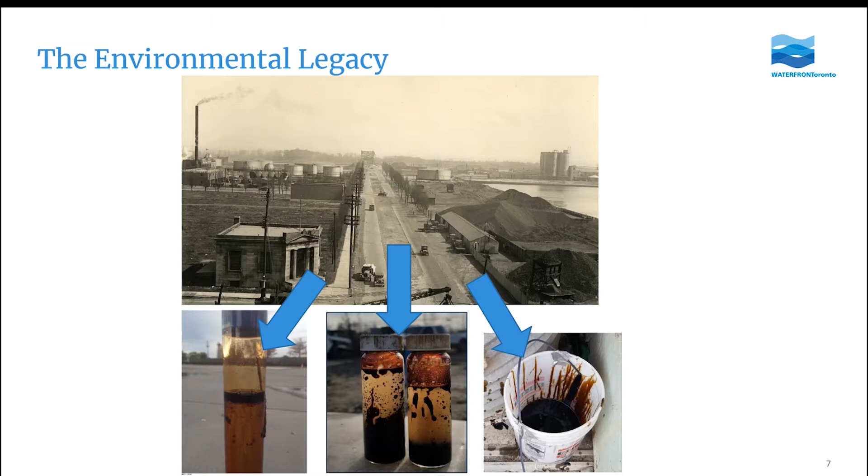I have some fun pictures here during some of the pilot test stages when we were able to recover some of the oil from the ground and look at ways to treat it. So this is some of the example of the oil that's in the ground that is present because of that former industrial practices. That's the significant environmental challenge of constructing a river through these lands that are heavily contaminated with this material. Next slide.

So these are the things that we work so hard through, over 6 years of looking at environmental strategy, doing over 300 different boreholes, another 300 monitoring wells to investigate and understand the soil and groundwater conditions through the Portlands area and come up with our really unique and very strategic environmental management system for building a new river. Next slide.

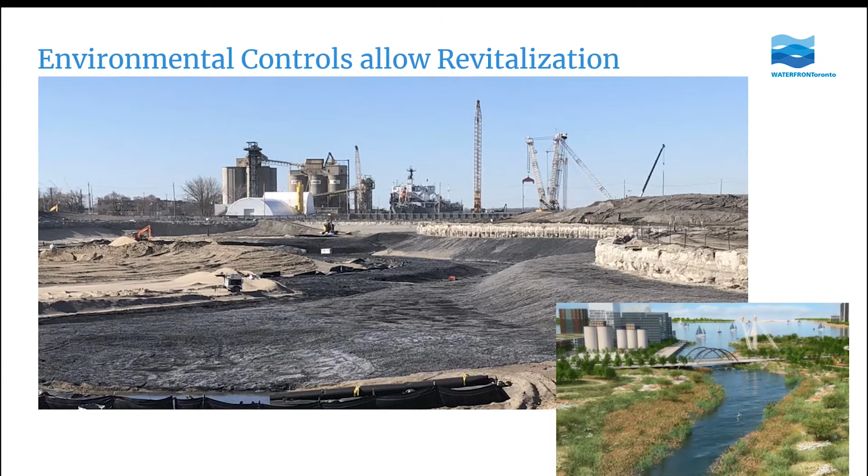Within the river valley itself, we have a system of features for environmental controls. You can see on the right side and the left side of the drawing, essentially a concrete wall that is the north and south walls of the river. And that concrete wall goes down 20 to 40 meters into the ground to make sure that the river inside is protected from anything that may be outside of the river. We also have a system within the river to protect from anything that might be coming from underneath the river. So what you're seeing is that black layer is actually part of the barrier system within the river that's comprised of a geosynthetic clay liner, a geomembrane, and then a reactive treatment layer, as a whole multiple layers of contingency to make sure that this river valley is protected. Next slide.

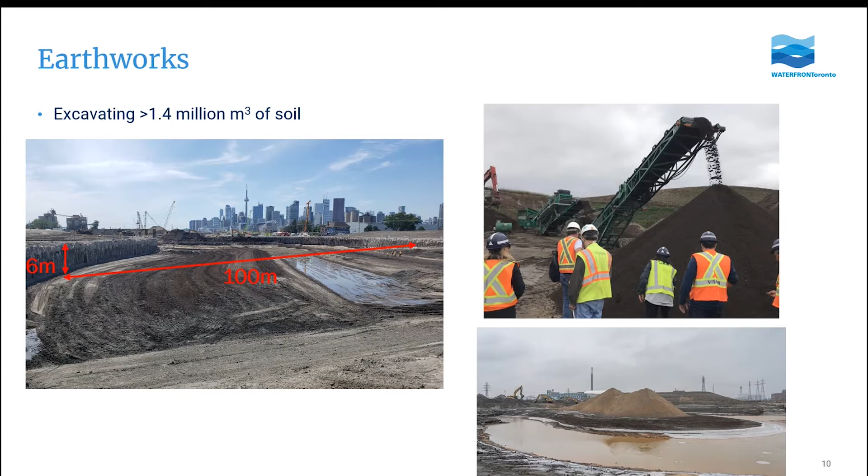Next slide. I mentioned earlier that part of the former director's responsibility was to make sure those environmental protection plans were in place, make sure the frameworks were well thought out, that could ensure that during construction, we really mitigate and manage and control our environmental effects.

There is extensive monitoring that's done during construction, and I thought that might be of interest to this group. These are not the only aspects that are monitored, but this is a good data set to consider amongst all the other data that's collected in the area. Surface water is sampled daily, and it has been daily since I think 2018 and will continue on until 2024. So 5 years of data of upstream and then downstream within the Port Lands vicinity.

Air quality is also monitored. There's 3 locations where we have continuous monitoring, and then there's additional locations within the construction zone and additional locations that move based on where the construction is at during that phase. Daily and monthly data is collected for air quality. So at the end of the project, there will be a considerable data set, really looking at the surface water quality, beginning at pre-construction, so baseline, and then all through construction.

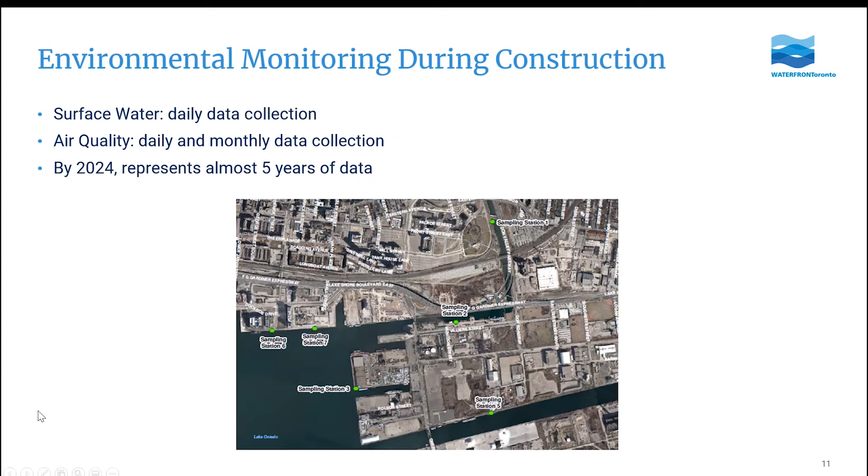Next slide. One of the questions that was asked of me is, what would I like to know about the Port Lands Flood Protection Project in 25 years to assess how it's performing? Now, I know my main interest is on those environmental management and environmental features that are installed, but I'm also curious about many other things.

Surface water quality improvements: looking through the data set on surface water pre-construction and some of the sediment quality pre-construction, it's obvious that there's been considerable improvements even before our project. I'd like to see how that continues, how we continue to improve the surface water quality with the Don River renaturalization.

Plastic. We see that within some sections of some of the habitat areas that we've already constructed, that plastic is collecting in these areas. And there's some other groups at University of Toronto that have been looking at different ways to remove plastic, and they've been monitoring some of the plastic that comes down the Don River. I'm interested to see if some of those aspects can evolve and we have less plastic coming down the Don River. Lower turbidity: much of that construction surface water monitoring is focused on turbidity. It'd be really nice to see how that's performing over time.

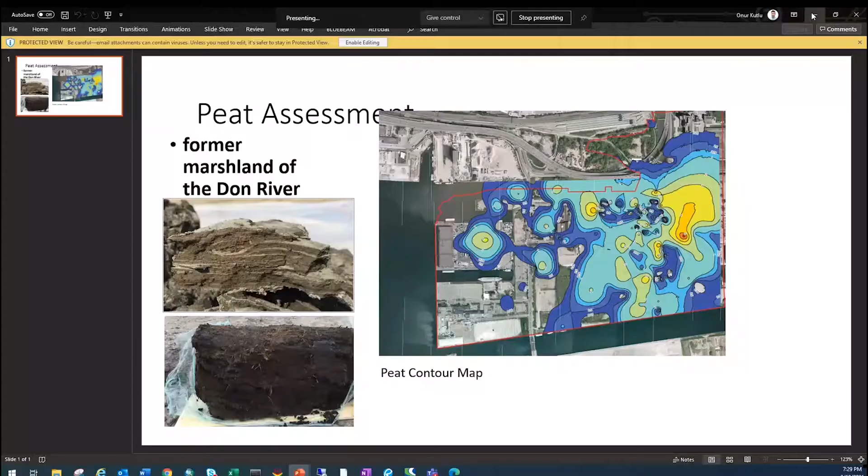Hello, everyone. I think Onur's going to bring up. Yeah, we missed you. We don't have a picture slide of you. So Onur is a project geotechnical engineer with PLFP, but he works for Geosyntec, and I'm so thrilled to have Onur on the project. He really clarifies some very, very complicated things. There you are. Thank you. I actually have never seen Onur's face. I've only seen the graphs that he produces, which are very clear as well. So welcome to Onur, and please do put your questions in the chat.

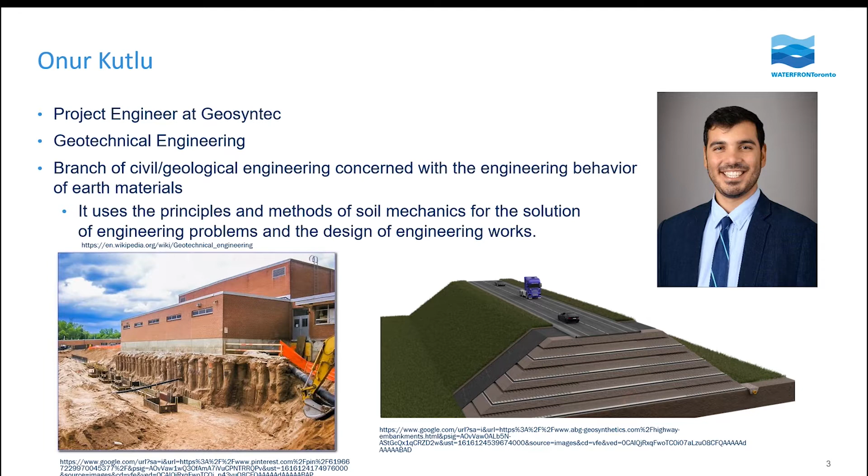So what do I do, and what is my role in the Waterfront Toronto project? I mostly work on the geotechnical aspect of the park features. And one of the first things that we do to engineer it is to collect data. Same as the environmental aspect, we need data first to be able to design anything.

I just wanted to show you a few pictures of one of the methods we commonly use to collect data. The picture on the right is a truck that is elevated from the ground a little bit for leveling out. And then it has what's called a cone penetration test, CPT. After the truck is elevated, an operator inside the truck starts operating the cone and pushing it at a steady rate into the ground.

As a zoomed-in view of how that cone looks, on the left it has a pointy conical shape, and then a sleeve on the back, and anything beyond that is just rods being added from inside the truck as we continue to push the cone. While the cone is pushed at a steady rate into the ground, we collect data, mostly in terms of how much resistance the cone is feeling as we push it in the ground.

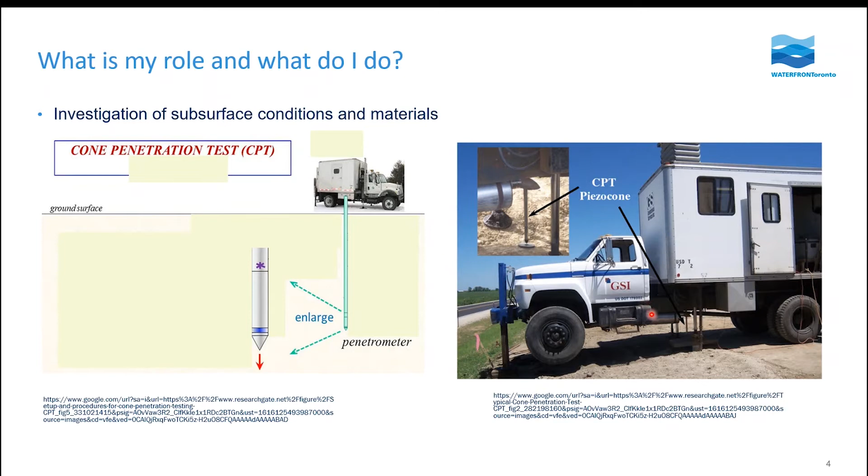So that's the first step for us: to collect the data and investigate the subsurface conditions and the materials at the site. The next thing, once we have the data, is that we need to evaluate it.

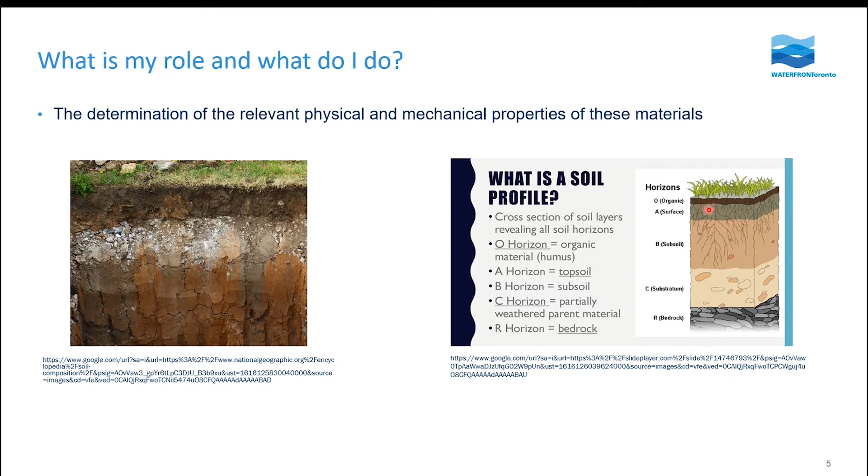And in the parks, as a depiction, it's not the actual design. It's a depiction where you see again the organic layers, called the horticultural layers, for the grass roots and whatnot. There's topsoil underneath it, and then a subsoil, which is generally the bearing layer the design work lies on top of.

So after we collect the data and interpret the properties, the next thing that we do is understand what the geotechnical challenges are at the site. There are a number of challenges that we look at, but I'll take this presentation to talk about one of them. This is actually one of the most challenging geotechnical problems that we work with on a daily basis in the project, and that is settlement. Settlement is a mechanical process that soil goes through over time, changing volume in response to changes in pressure.

As I'm sure most everyone here has seen some version of this picture, the Pisa Tower in Pisa, Italy, where the tower is leaning and not straight. The reason is that after the tower was built, there was a change in the pressure on the soil supporting it, and over time there was differential settlement on only one side, and that's why it's leaning like this. It has been stable for decades now, though there are still ongoing settlements, I can tell you that. This is perhaps one of the world-renowned landmarks to help you visualize what happens when settlement occurs over time.

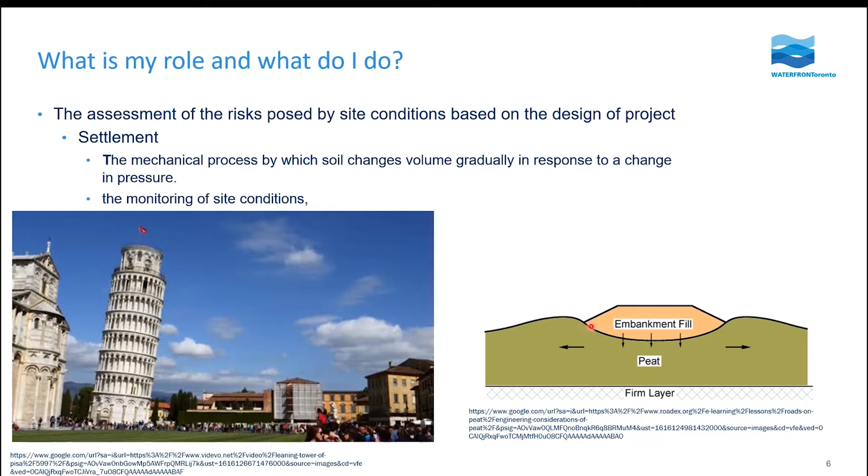In our project, though, what we are building is mostly fill over existing ground. In this case, the existing ground is the black line overlying a material defined as peat. Over that peat, as Meggen indicated, we'll be elevating the grade to protect against flood events, which means we need to place soil over the ground surface. When we place the soil, if there are compressible layers such as peat, the peat feels this change in pressure due to the fill placement and starts to compress. It can be a large magnitude of compression, depending on how much load we are placing or how compressible the peat is. Over time, that settlement happens, and finally it comes to a stable point.

Just to give everyone a settlement concept analogy: how we evaluate settlement to design the features overlying the subsurface is that there are two components to it, magnitude and time. Both of them are very important for us to understand how the soil is going to behave.

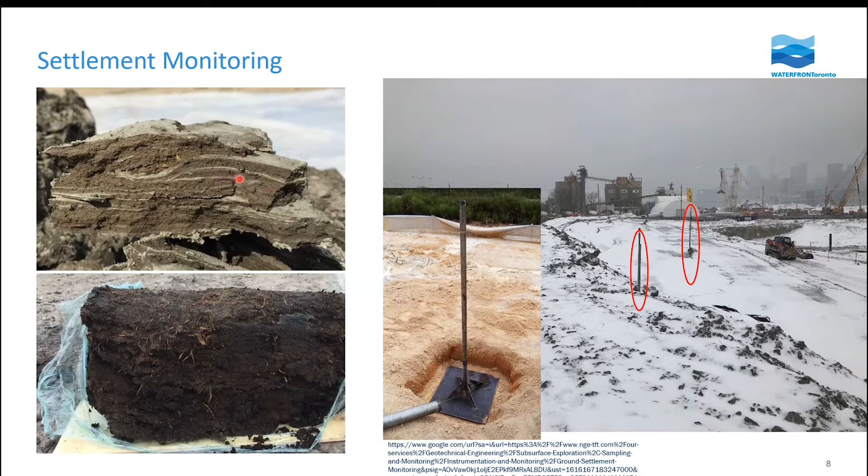They're so light that even just one or two people can hold them up and place them on the ground. And if you recall from my earlier slides, one of the key aspects of settlement is the change in the pressure. If we do not use a conventional soil to build these landscapes or park features, and instead use these blocks, the soil underlying it is not going to feel much of a change in the pressure.

So this is one of the solutions that we're looking into: not to use a conventional soil, so that there's not much settlement. Instead, we're considering using these geofoam blocks that are so light that they wouldn't change the pressure, or if they do, there would be very minimal change in the pressure felt by the soil underneath.

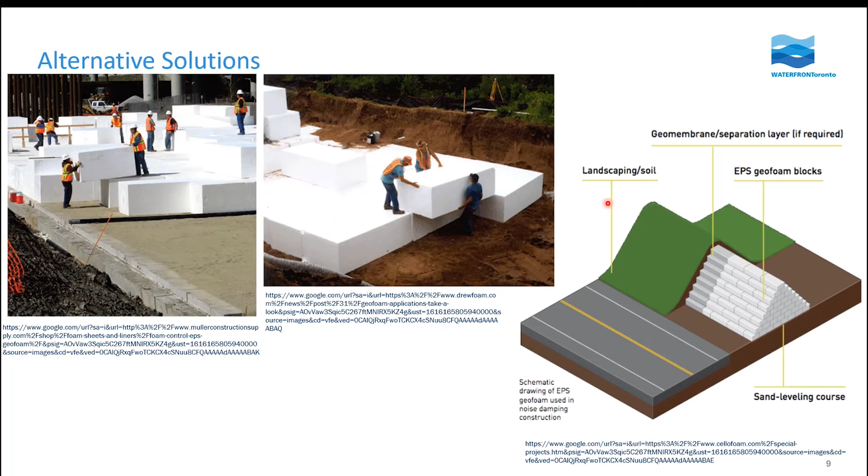performing over time. But again, as I showed in my first slide, we will not be seeing those geofoams because they will be buried underneath the pathways or the lawns and whatnot. They will be buried under the landscape, but they will be there. As you see in the cross section on the right, there are blocks of geofoam stacked on top of each other with a soil layer on top.

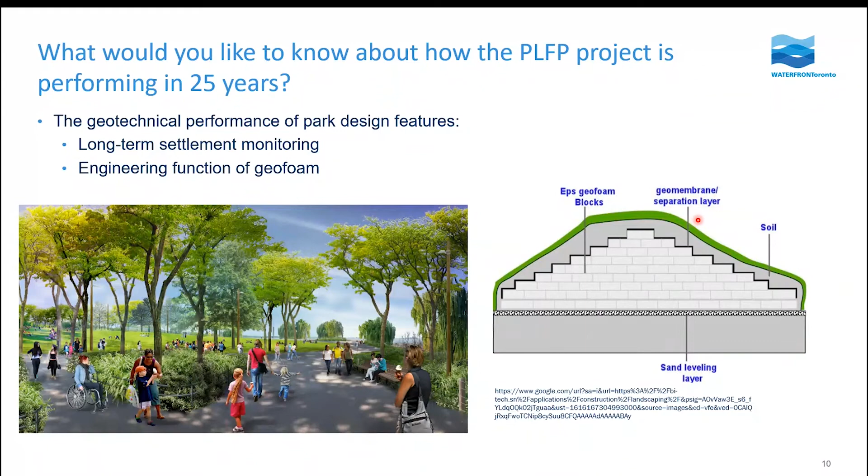And this green layer could be the lawn yard or it could be the pathways. The geofoams will be supporting different park design features as you visit the park. So with that, that is the end of my presentation.